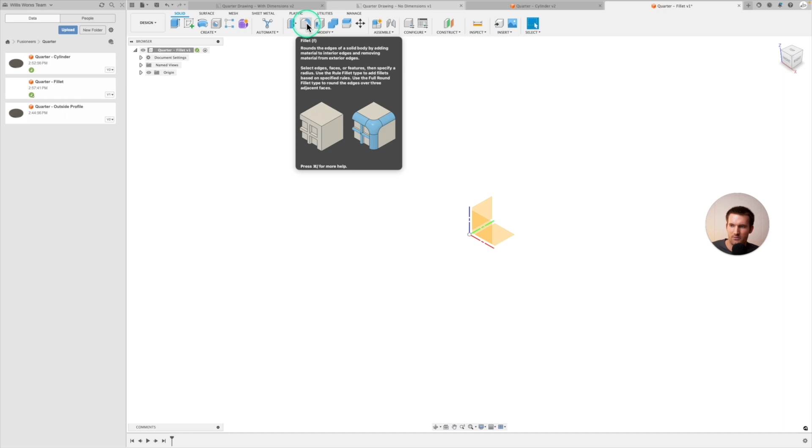And if you think about it, how are we going to make a quarter using a fillet? So first you need to know what a fillet is. A fillet is basically rounding off a corner. So if we need to round off a corner, we need to have a corner. So what is a shape that has corners on it that can be filleted into a circle? That would be a square, right? So let's go ahead and click Create Sketch. Let's select this bottom plane here.

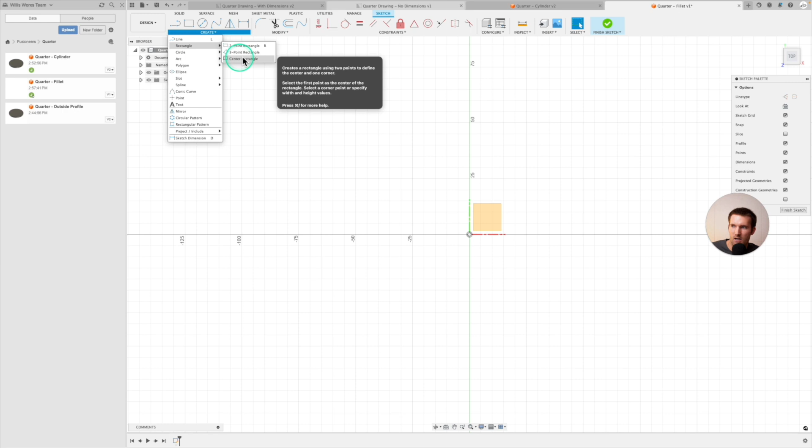Now what type of sketch you use, you can actually use a lot of different ones, but the one that makes the most sense to me is actually not up here on the shortcut menu. So if you click the down arrow on the Create tab here and highlight Rectangle, I really like the center rectangle, and I'll show you in just a second why. So let's select Center Rectangle. The way the center rectangle works is you select the center first, kind of like the circle that we used previously, and then you dimension out the sides.

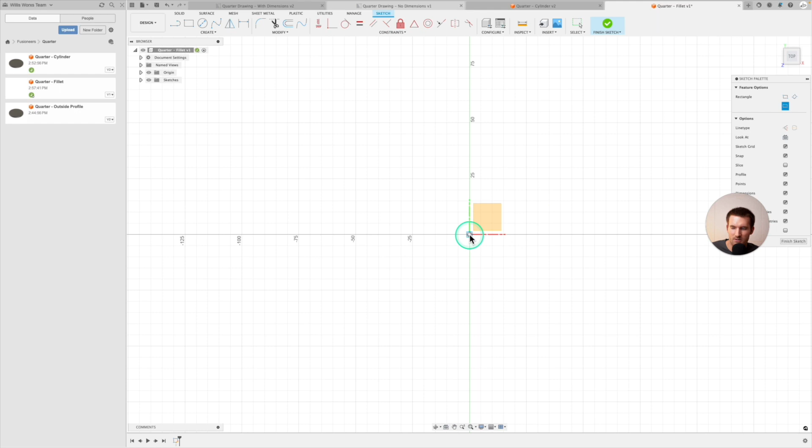So let's go ahead and let this be coincident with the center here. So we click there, and then we drag it out. And you can actually see sometimes it'll detect certain sizes. So right now that's a square. They're both 30 millimeters, but I'm just going to make it whatever shape we want right now. And you'll see again, this is not constrained. We haven't given it dimensions. It can be altered as far as the lengths of these sides.

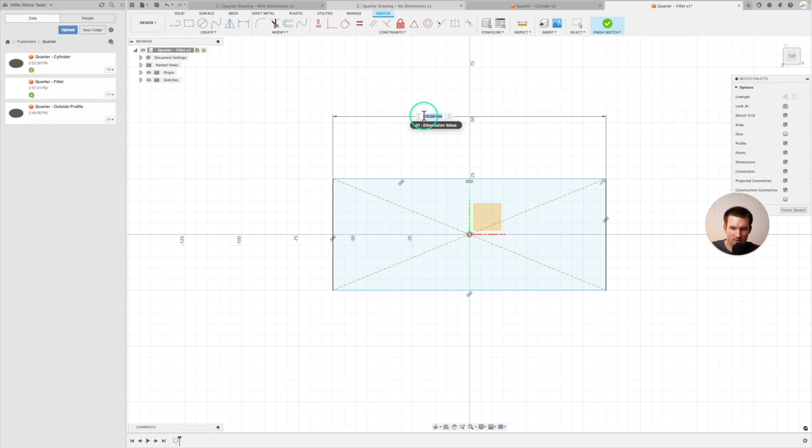So the way that we give it dimensions is we click on Create and then Sketch Dimension, or we use the shortcut key, which is what I recommend you doing, D. And then we select the side. And then the side is going to be 23.4 millimeters. And the reason I did it 23.4 is because the diameter of a quarter is 24.3. That's my mistake. So let's go back and make sure we edit that. It's 24.3.

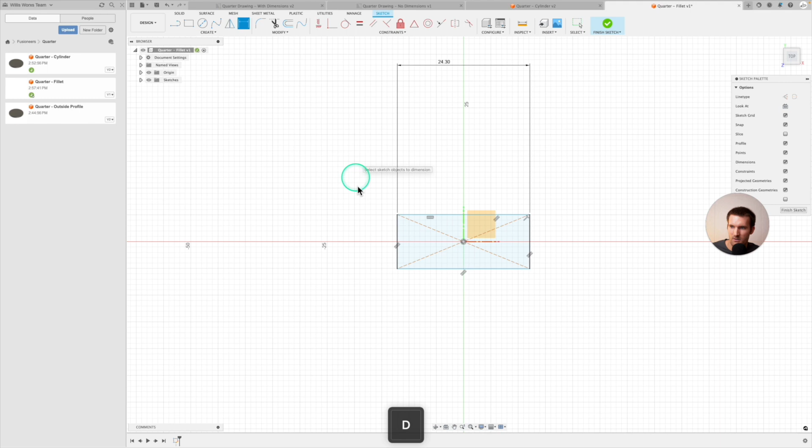And now you'll see that this is not a square. This is a rectangle. So there's a couple ways to make this into a square. One way that I like to use a lot is just to use the D shortcut again, which is dimension. So click D and then select this other side, and you'll see it's a lot shorter. Then we click again, and now we could type in 24.3, but there's an easier way, and it's just to click on 24.3, and you'll see D1 is referenced, which is saying that it's referencing this dimension. So when we click enter, you'll see that now we have a square. So that's the way that I like to do it.

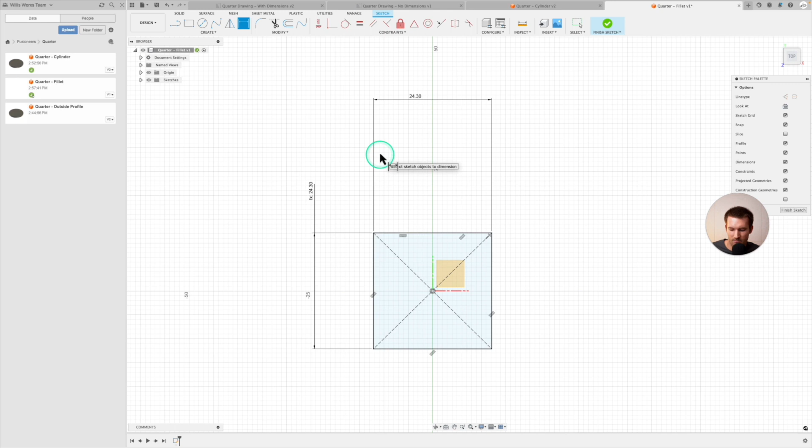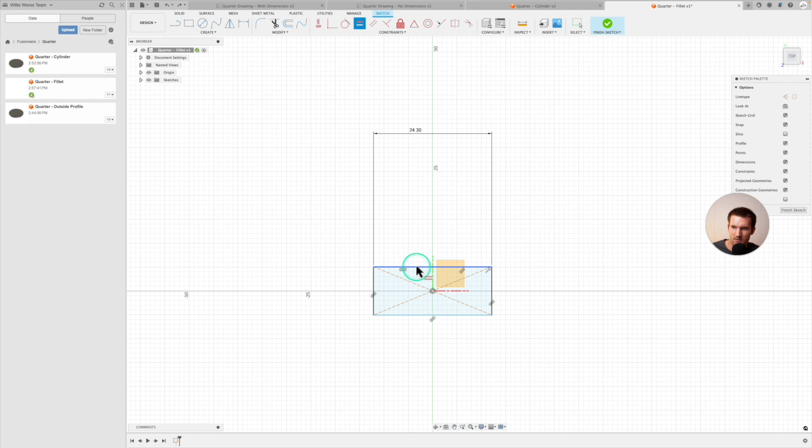It's not necessarily the same as adding a constraint, but it effectively does the same thing. I'll quickly go back and undo this just briefly. And so now we're back to before I added that constraint. Another way to do it would be to add a constraint where we make this side equal to this side. So if we go up here and we find this constraint, which is equal, click on that. And then we make this blue line equal with this line. And so that makes a square as well. So either way works. It's whatever your preference is. But again, that's how you make the square.

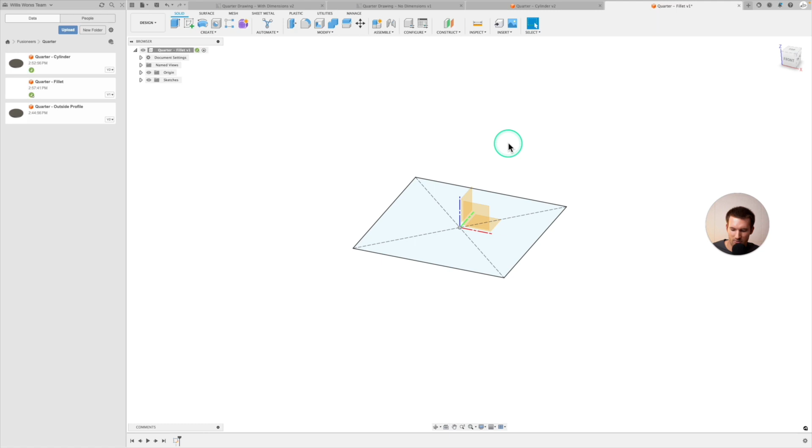So now we're going to go ahead and click Finish Sketch. And now we're going to extrude this 1.8 millimeters. So you can go up here and click Extrude, but again, we're using our shortcut. So just click E on your keyboard. And now we're in the Extrude command. And since it already has it highlighted for us, we're going to type 1.8.

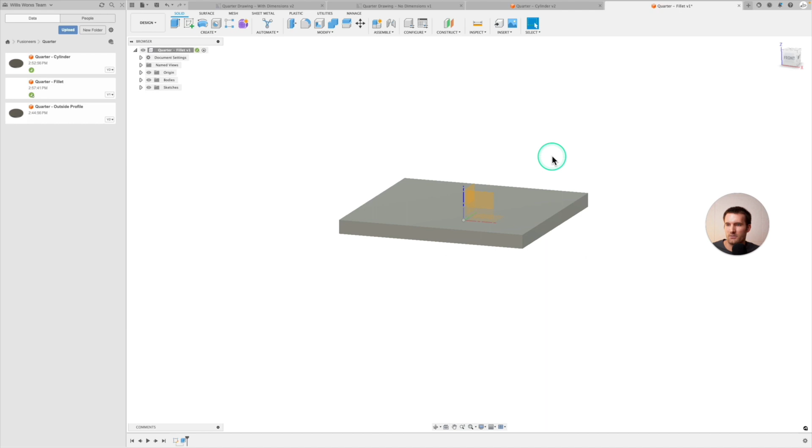And then click Enter. So now we have a 1.8 thick square, or rectangular prism actually. So now the next step is to make this into a quarter. So how would we do that? We would add a fillet on all four corners.

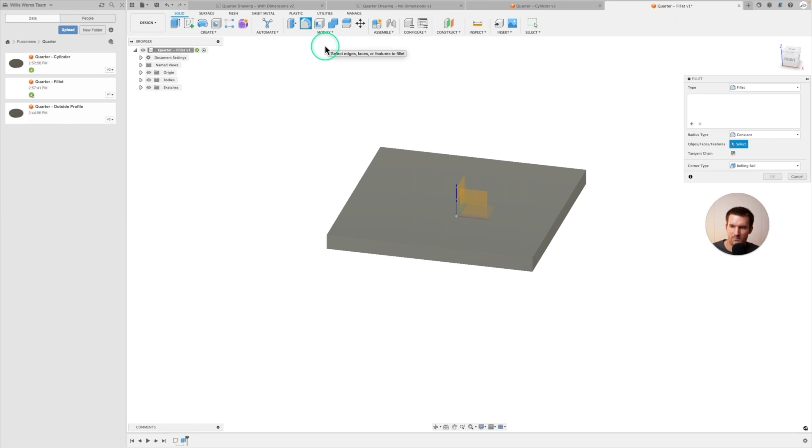So this is how you get to fillet. You can click Modify Fillet, you can click the shortcut, or you can use F. And if you'll notice, most of the time the keyboard shortcut is the first letter of the word. So if you just kind of know the basic vocabulary, usually you can get to it pretty quickly. So this is the fillet command, or the fillet window.

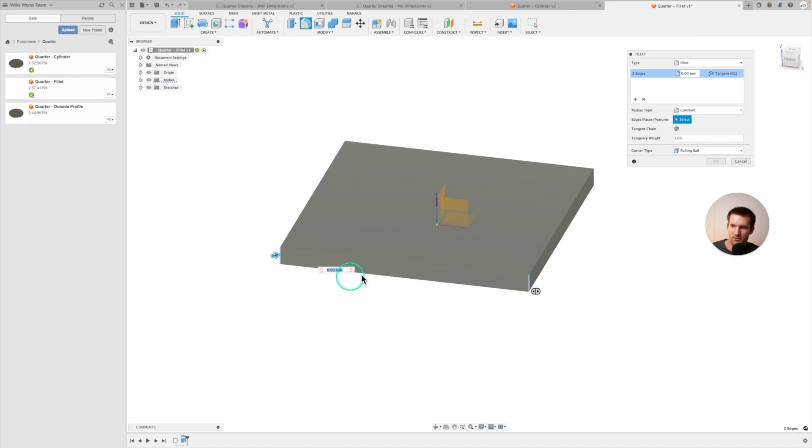And what we're going to do now, it says that we're going to select the edges, faces, features. So select this corner, and we're going to rotate around, select this corner, and then select this corner. Okay. And then as far as the thickness or the size of the fillet, if we do our diameter size, which was 23.4? Okay.

So you'll see that we get that error, right? It's not going to work because we need to do the radius. So you can calculate out the radius. It's going to be a decimal, right? But what I like to do is I like to say 23.4 divided by 2.

So that's a good thing to know about Fusion, is it can do basic math, right? So I mean, it's a pretty complicated piece of software, and it can do division. So anytime you need to halve something, just put in the full number and then divide by 2, or /2, and then you get half of that. And click Enter, and now you'll see that we actually, I did it wrong.

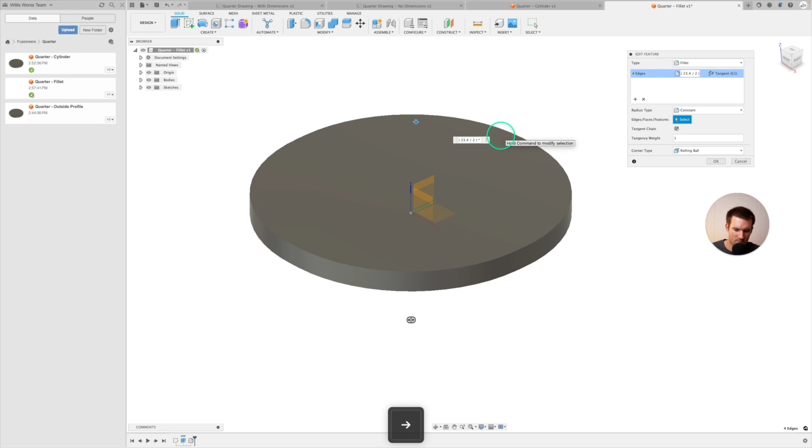Edit feature, it is 24.3. I get those backwards sometimes. Okay, so now if we select the edge, you'll see that the diameter is 24.3, which is what we wanted, right? Which is the diameter of the quarter. All right, so now we've made a quarter in a couple of different ways. This way was using fillets.

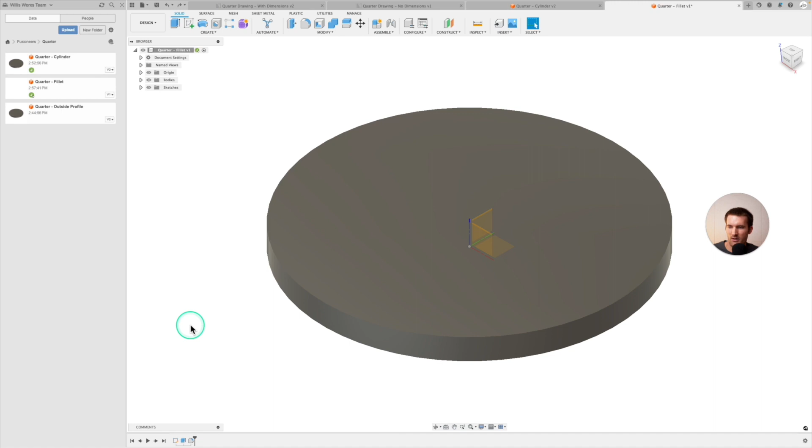And the last kind of tip I want to show you, and I'll show you more of this going forward, is a little bit of an issue that we've created for ourselves using that 24 divided by 2 method that I showed you a second ago. So if we go back and we edit sketch and we change this number, say we were trying to do a dime or something smaller than a quarter, so let's change it to 10 millimeters. This will update, and we didn't have to change the other side because we just told Fusion that we wanted this side to be equal to this side.

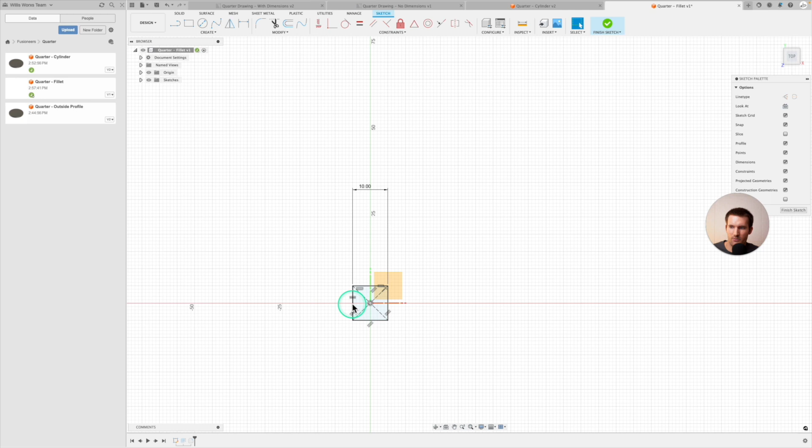And the reason that the other side updates is because these are all constrained into a rectangle, so you don't have to update all 4 sides. So if we click Finish Sketch, try to think where this is going to go wrong. And so we get this error. And the reason for that is because this did not update. This 24.3 is from what we typed in earlier. So wouldn't it be nice if we could somehow reference that length that we made?

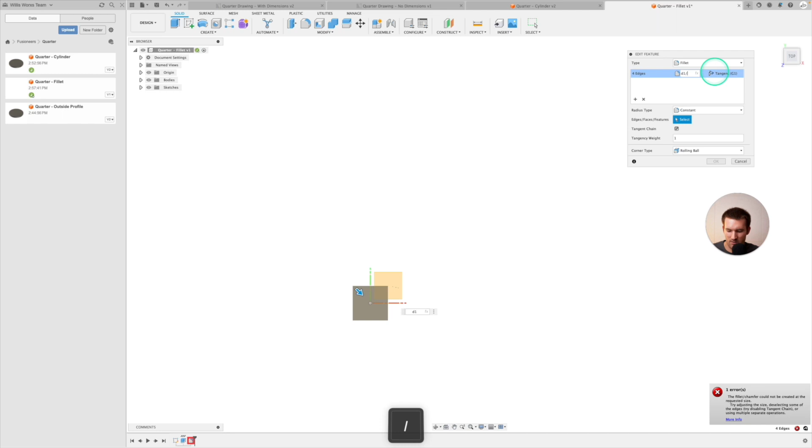Well, there is. So if we go and delete this and then just say D1, which is, if we go back and remember, what we set it equal to when I showed you how to do that earlier, divided by 2, and click enter. Now that updates. And the reason is because we basically referenced a specific kind of model parameter. So if we go up to Modify, Change Parameters, and then we click down here, you'll see D1 is 10 millimeters. So this is kind of the assigned variable for that dimension that we made earlier, which was the dimension of the square sketch.

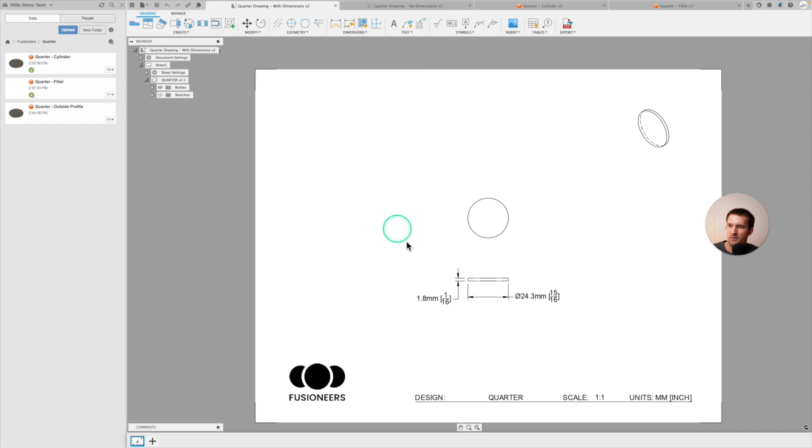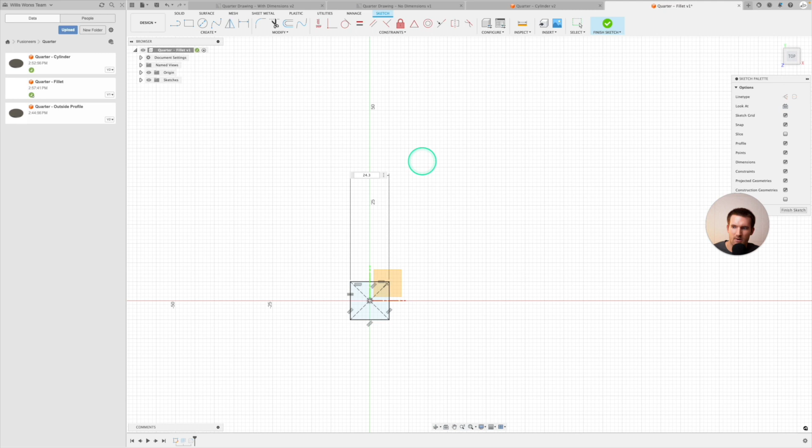So now if we go back and change this back to, I don't want to say it wrong again, 24.3. So let's change this to 24.3. Now, do you think that it's going to calculate correctly or not? And the answer should be yes, because now we're referencing whatever's in this box, which is D1. And we're essentially just dividing D1 by 2 to get our fillet radius. So if we click enter, it increases the size back again, finish sketch, and now it works.

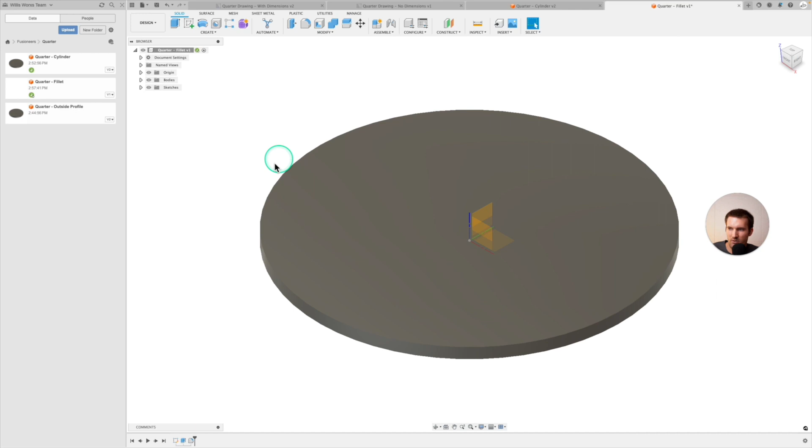Let's try an even bigger coin, so make it 50. Is it going to work? So it works. So that's what is really nice about Fusion and just parametric design in general, is once you kind of understand the basics of the software, you can make pretty complicated things. So again, that's a little bit of an advanced topic, to be honest, but I thought this is a good opportunity to kind of demonstrate that. And if you got lost, hopefully you can go back and look at it.